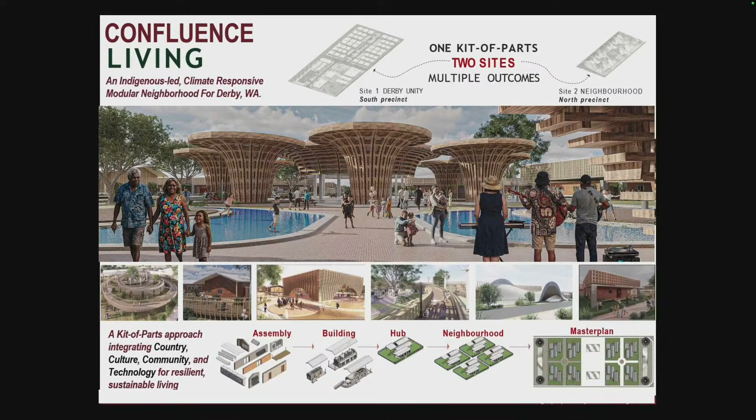Welcome to Confluence Living. Imagine a place where country guides design, culture shapes community, and technology enables a more sustainable future. Confluence Living is an Indigenous-led, climate-responsive neighbourhood for Derby, Western Australia. Built out of one simple idea: one kit of parts, two sites, multiple outcomes. Through modular design, digital engineering, and modern methods of construction, we've created a scalable housing solution that is resilient, culturally responsive, and adaptable to future community needs.

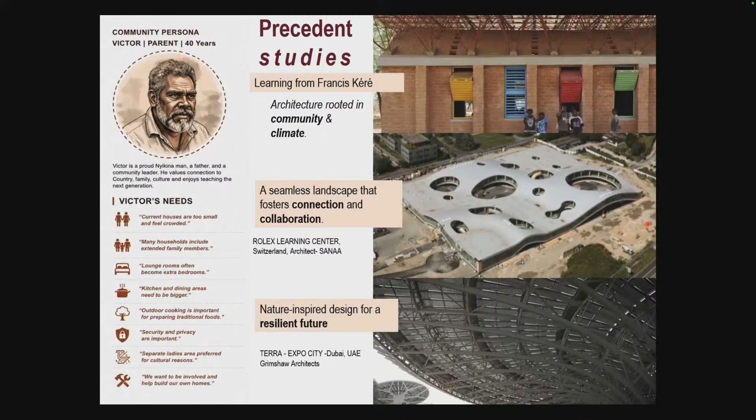Confluence Living isn't just inspired by great projects around the world. It begins by listening to the Derby community through Victor's story and understanding what people truly need. We then combine those local aspirations with lessons from Francis Kéré's community-centered architecture, the collaborative spaces of the Rolex Learning Centre, and the climate-responsive design of Terra, Expo City Dubai, creating a neighbourhood that is culturally meaningful, resilient, and built for the future.

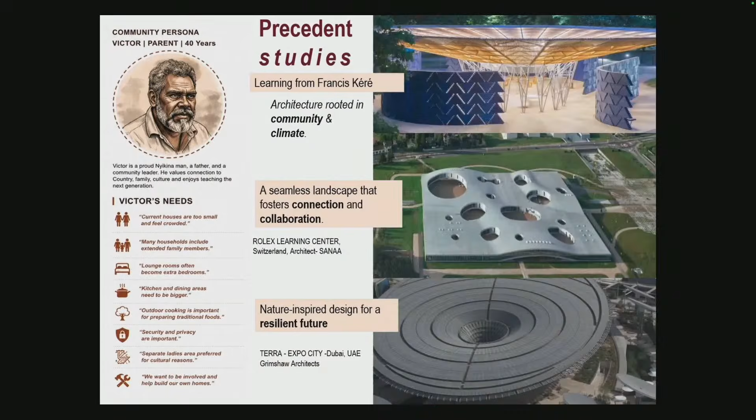Confluence Living transforms community aspirations into a practical design solution. Our approach first begins with understanding Derby's climate, culture, and community needs.

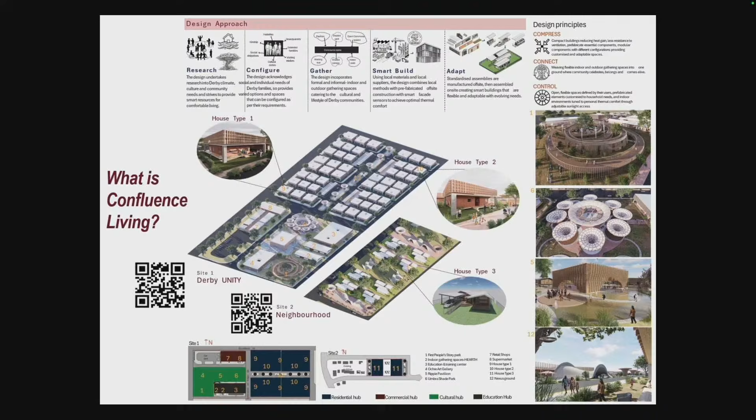Configuring flexible spaces for different family structures, creating places that bring people together, integrating smart construction and local materials, and finally adapting through a modular kit of parts system.

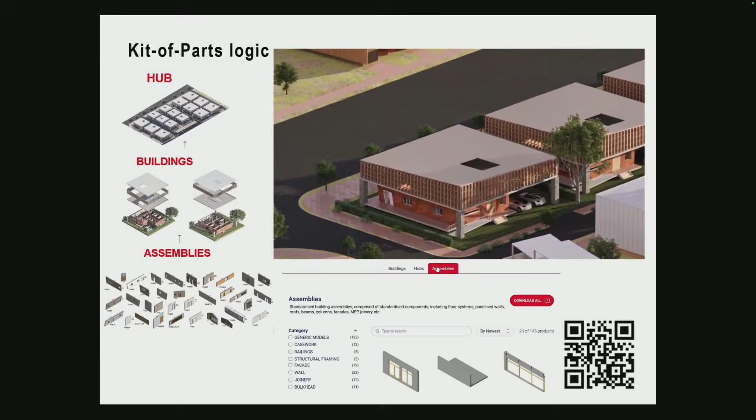Our design follows a simple kit of parts logic. Standardized assemblies come together to form adaptable homes, and those homes are organized into connected community hubs. This creates a flexible system that can grow with the community.

Our kit of parts system creates a complete neighborhood through a simple hierarchy. We developed 4 functional hubs: residential, cultural, commercial, and educational. Within these hubs, we designed 9 different building types.

These include 3 housing typologies and a range of community facilities, such as the pavilion, art gallery, education center, retail spaces, and supermarket. All of these are assembled from a shared library of standardized components, allowing both sites to be delivered efficiently while responding to different community needs.

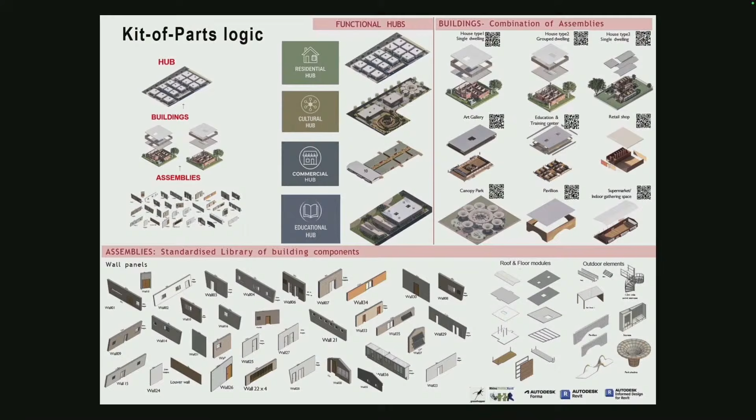Listening to the community showed us that one house type wasn't enough. We created 3 housing typologies: a multi-generational family home, a flexible home for smaller households and essential workers, and a clustered home with shared living spaces for extended families. Together they reflect the diverse ways people live in Derby.

Let's take a closer look at house type 1, designed for multi-generational living. Using our kit of parts system, standardized wall, roof, and floor components are assembled into a flexible home that can be built efficiently.

The central open courtyard improves natural ventilation, daylight, and family interaction, creating a comfortable home that reflects the way extended families live in Derby.

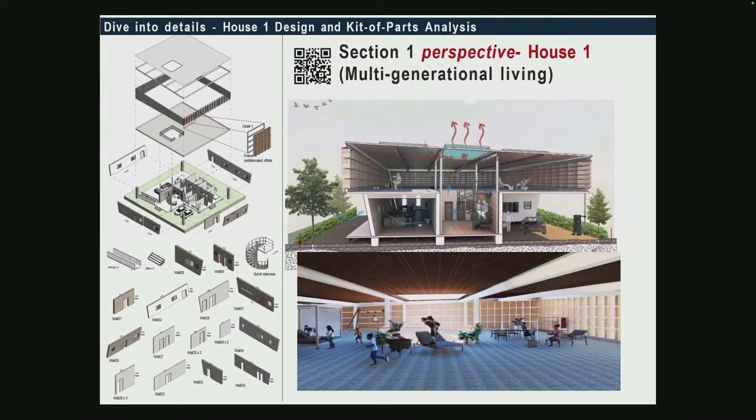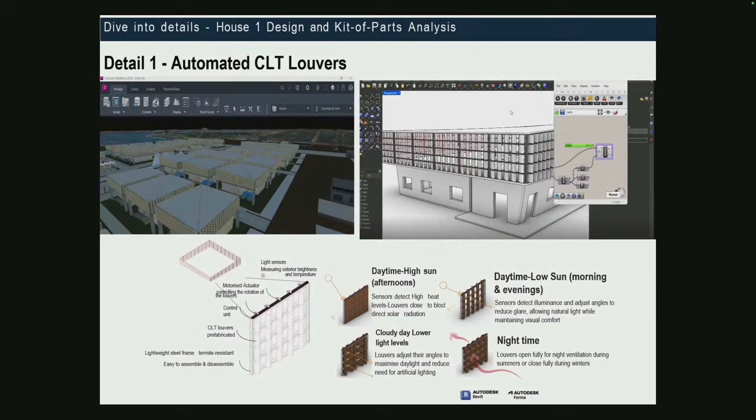To improve comfort and energy efficiency, we developed automated CLT louvers using Rhino, Grasshopper, Revit, and Autodesk Forma. Light and temperature sensors continuously adjust the louvers throughout the day, blocking excessive heat, maximizing natural daylight, and providing natural nighttime ventilation. This creates a smarter, more comfortable home.

Sustainability is integrated into every part of house type 1. Elevated floors, deep shaded verandas, natural ventilation, high performance wall systems, and solar energy work together to improve comfort and reduce environmental impact. Using Autodesk Forma Carbon Insights, we also optimize the design to lower embodied carbon while creating a home that responds to Derby's climate.

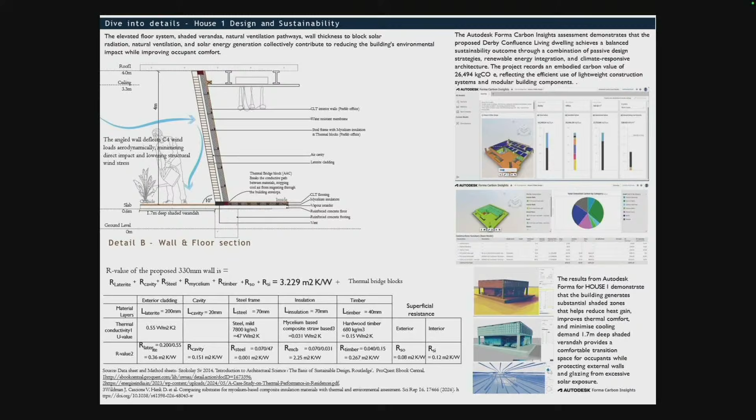We used a BIM integrated structural workflow, transferring our Revit model directly into Autodesk Robot Structural Analysis. This allowed us to test the building under real loading conditions, optimize the structure, and ensure it is safe, efficient, and ready for construction.

To support construction and coordination, we developed a federated BIM model at LOD 300, integrating mechanical, electrical, and plumbing services. Using Autodesk Revit and Navisworks, we coordinated all disciplines, resolved clashes before construction, and delivered an efficient, buildable, and fully coordinated MEP design.

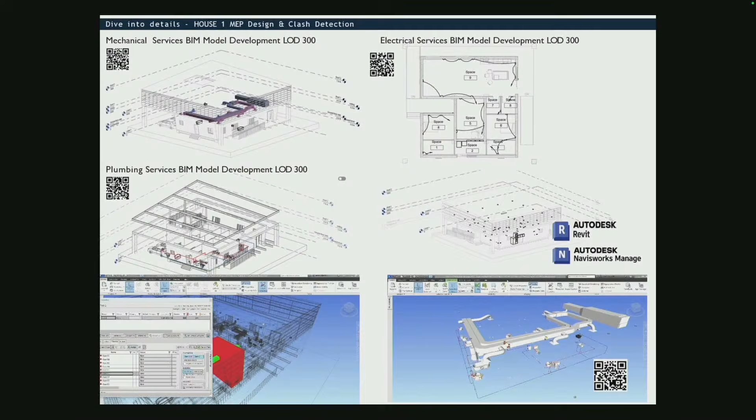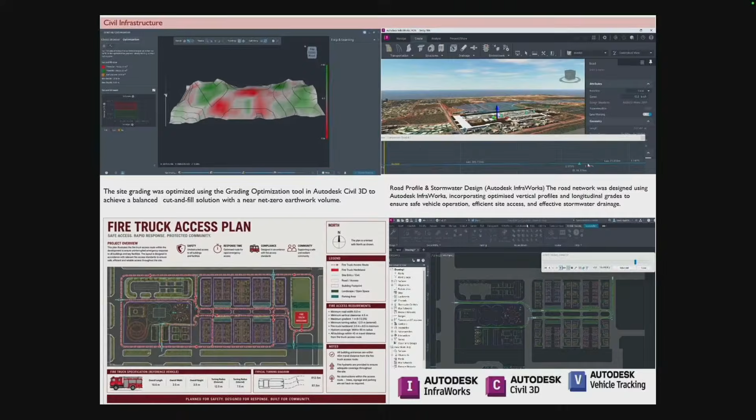Our work extends beyond housing to the entire site infrastructure. We optimized earthworks to minimize cut and fill, designed roads and stormwater systems, and verified emergency vehicle access using vehicle tracking. Rather than resisting nature, Confluence Living works with it.

We use prevailing winds for natural ventilation and renewable energy, while integrated bioswales, infiltration tanks, and rainwater harvesting manage stormwater and reduce flood risk. These systems create a climate-responsive neighborhood that is both resilient and environmentally sustainable.

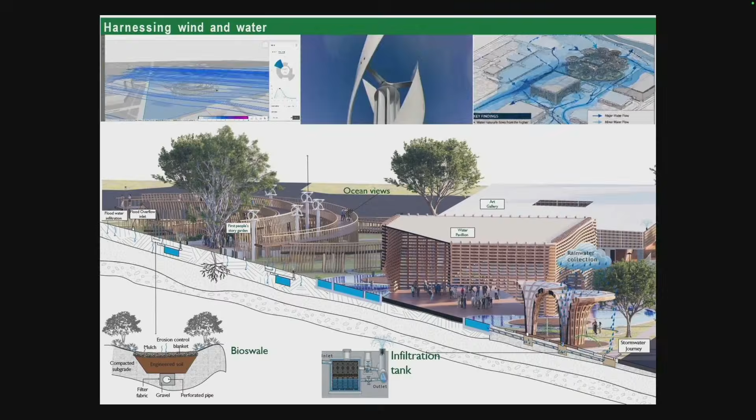At the heart of Confluence Living are our gathering grounds, spaces designed to celebrate Derby's Indigenous identity and strengthen community connections. The First Peoples Story Garden, Umbra Park, and Ripple Pavilion create places for storytelling, learning, festivals, and everyday gathering.

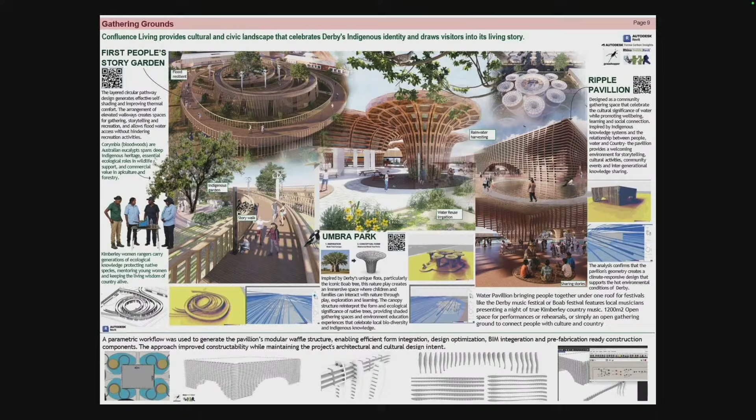Inspired by local culture and nature, these spaces were designed using a parametric modular system, making them both culturally meaningful and efficient to construct. Our proposal goes beyond design by delivering a complete construction strategy.

Through a temporary local factory, standardized assemblies are manufactured using local materials and suppliers, then assembled on site into homes and community hubs. This approach reduces transport, construction time, carbon emissions, and waste, while creating local jobs and supporting Derby's economy.

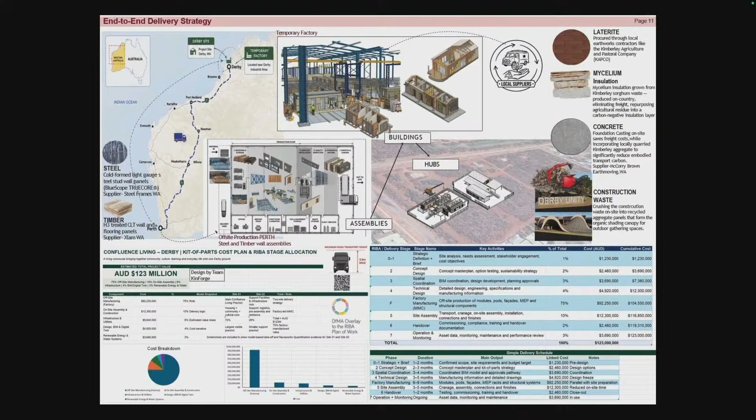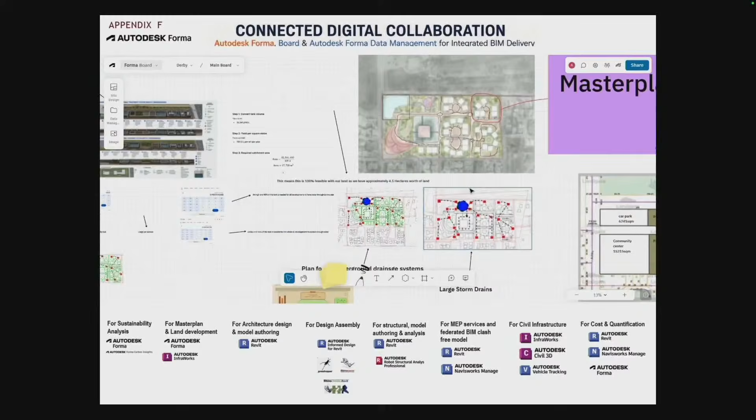Confluence Living was delivered through a fully connected digital collaboration platform. Autodesk Forma, Board, and Forma Data Management enabled our entire team to collaborate in real time.

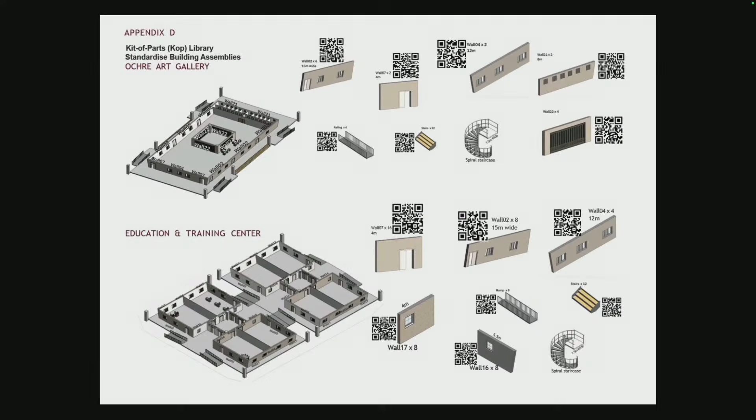Finally, our appendices provide the complete kit of parts library for every building in the project. Each assembly, wall, roof, floor, and structural component is documented with digital models and QR codes, creating a standardized reusable system that supports manufacturing, assembly, future maintenance, and scalability across both sites.

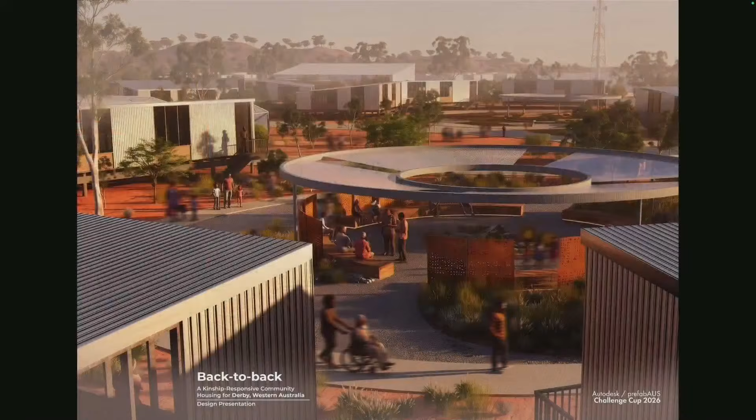I understand that we're playing my video, but I'm also happy to present live. Can you just say something? Yeah, we're playing your video now. Thanks, Mackie. Hello everyone, this is Back to Back, a kinship responsive community housing model for Derby, Western Australia. Can we see it? Can you grab the laptop?

This is an Indigenous-led housing community master plan aimed at proposing culturally grounded housing solutions using sustainable building technologies and construction methods for regional Australia.

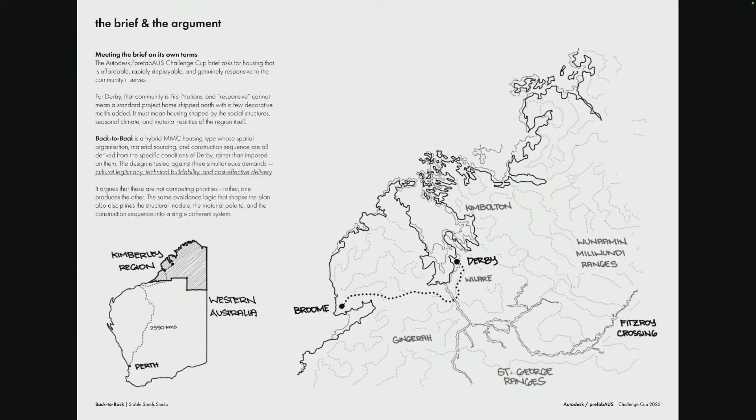The brief calls for housing that's affordable, rapid, and genuinely responsive to community. For a First Nations town, that can't mean a standard home with decoration added, so every decision here, plan, material, structure, flows from one cultural logic.

And that logic is what is called a Jigal, a Kimberley protocol where a son-in-law and a mother-in-law will avoid direct contact out of respect, not out of shame. It's how a large household functions harmoniously when visiting kin stay long-term. A standard home with one door and open living makes that very hard to observe. So we started not with the floor plan, but with that relationship.

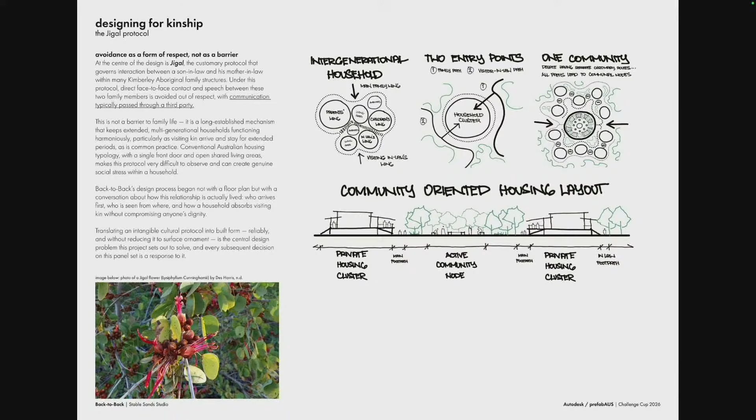The answer is two equal wings joined by a shared spine. The core family's wing and the visiting in-law's wing each get their own entry, deck, and living space, so a mother-in-law can stay with dignity, not tucked into a lesser granny flat. The spine between them is shaded and ventilated, close but not face-to-face.

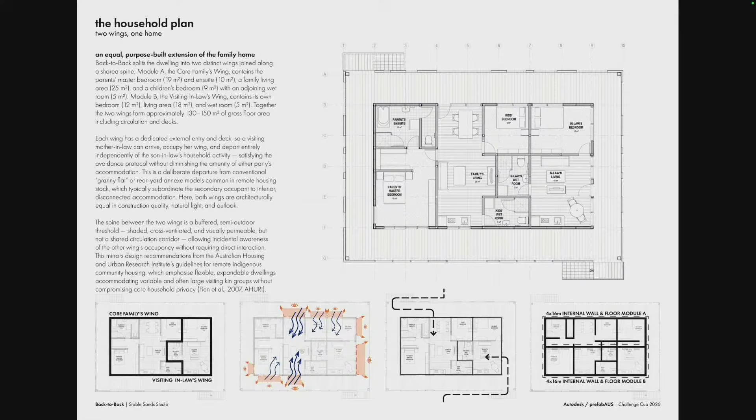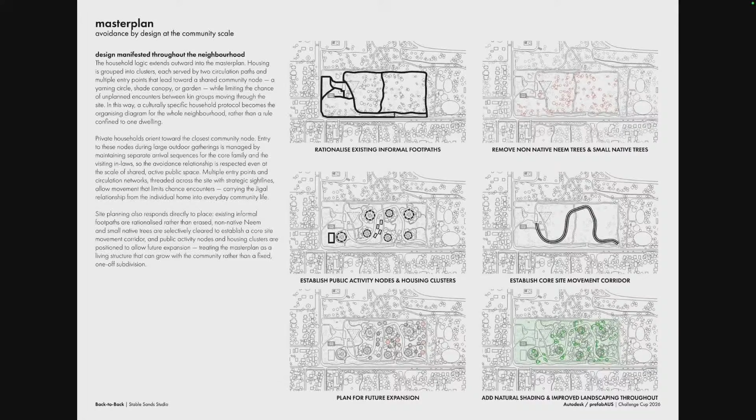That logic scales out. Each housing group gets two circulation paths and multiple entry points, all leading to shared yarning circles and community nodes. So the same protocol holds even in busy public space.

We kept the site's existing footpaths and planned the whole layout to grow over time. Shared ground sits at the center: yarning circles, barbecue nodes, and an adaptable polytunnel garden that flexes with the Kimberley seasons, supporting farming and gathering all year round. It's public space that's shaped around how the community already moves and meets.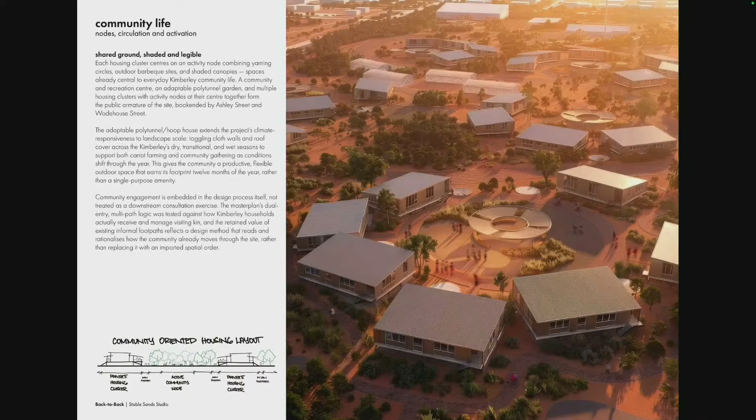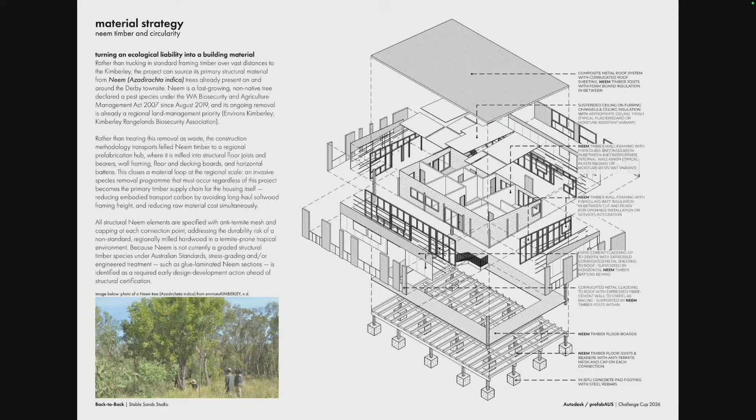The house is built almost entirely from neem timber, an invasive species already being removed from around Derby under a biosecurity program. Instead of trucking timber thousands of kilometers away, we mill that removed timber regionally into framing and decking. A land management obligation becomes the building's material supply chain.

Everything is designed for off-site manufacture. Transportable 4x16 meter walls, floors, and roof modules are built in a regional prefabrication hub with services fitted before they reach site. Only footings and final assembly happen in Derby, taking one dwelling from 6 months down to 10 to 12 weeks.

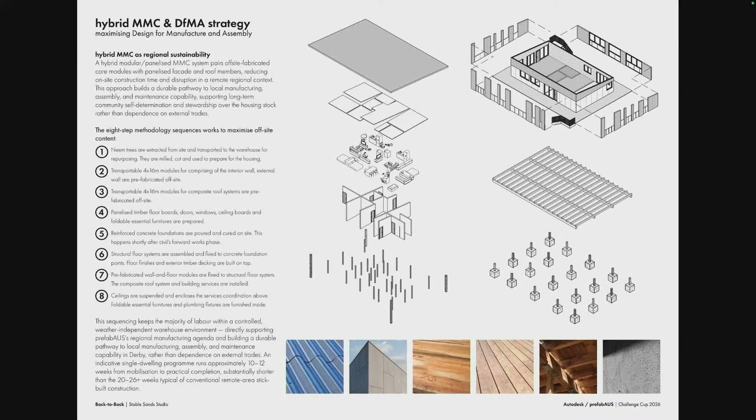Structurally, it's a lightweighted, elevated timber platform on isolated concrete footings, chosen because it prefabricates cleanly, resists Derby's cyclonic wind loads with continuous tie-down strapping, and keeps the undercroft open so floodwater passes straight underneath.

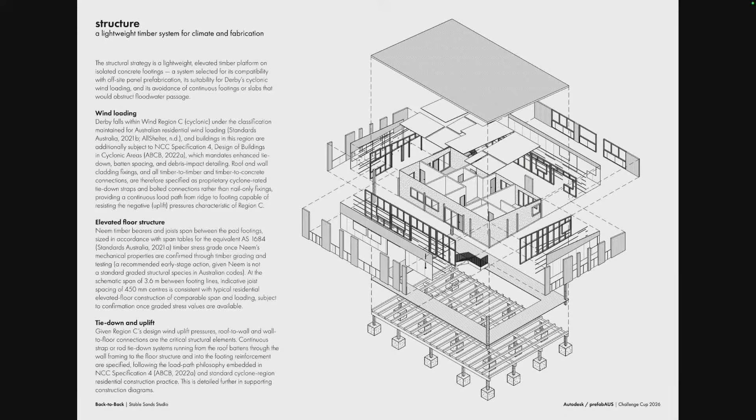Passive design comes first: cross ventilation, deep shading, and a ventilated roof cavity reduce reliance on air conditioning before any technology is added. The floor sits clear of flood level, and every dwelling is pre-wired for solar and battery storage.

Services follow the same logic. Bathrooms and kitchens arrive pre-plumbed and pressure tested. Wiring is pre-installed in wall and ceiling panels so on-site. Trades simply make final connections.

None of this works from architecture alone. It took structural, sustainability, and cultural expertise working as one team, and it's costed to prove it: around $450 to $580,000 per dwelling, with the first 13 homes feasible within 4.4 to 6.9 million. Thank you.

I'm really interested to hear about what you learnt from the Traditional Owners during the workshop that informed your design, apart from the kinship aspects—certainly things around site layout and overall building arrangement, if you want to talk a little more about that.

Yeah, for sure. The workshops were always the starting point, because Aboriginal housing has always failed in a sense that so far it's been gentrified with the types of housing that the government has given the First Nations people, especially around Broome.

I've been to Fitzroy Crossing, I've been to Derby myself, I've been to Broome, and it doesn't work because the intergenerational household is very unique for them. As the nuclear family grows up, the grandparents move seasonally, from one side to the other every few weeks or so. And of course, the Jigal is one that we don't expect from a Western standpoint—it's actually a hierarchy and a principle of respect.

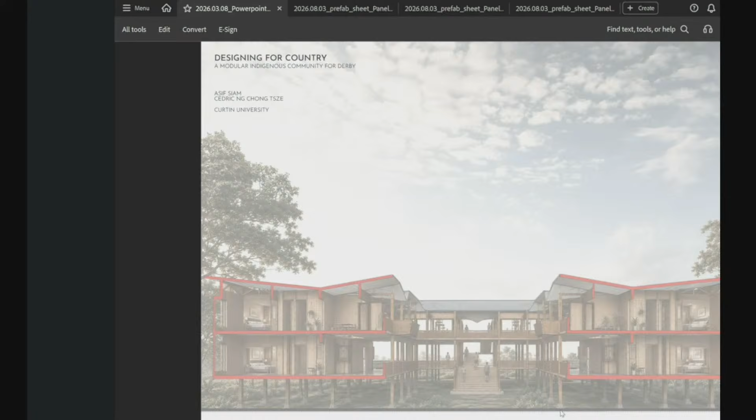Thank you very much. Today we had the opportunity to design prefab housing for Derby, and me and Cedric, my teammate, had the chance to design this. From the very beginning, I'd like to say this is a great opportunity to work for the indigenous people, because as an immigrant here, this opportunity just came out of nowhere for me. Firstly, I would respectfully like to acknowledge the elders and custodians of this land.

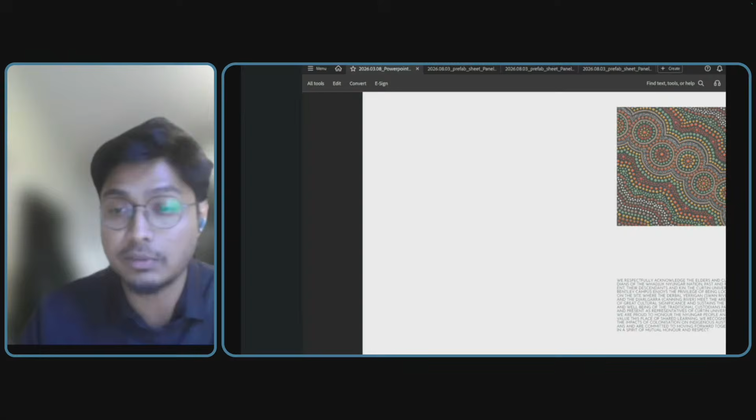This has been a big journey for me, because I took these courses the other way around, and during this time I had the chance to learn more about Derby and more about the indigenous people. A little brief about the indigenous people around here, and also about Derby itself.

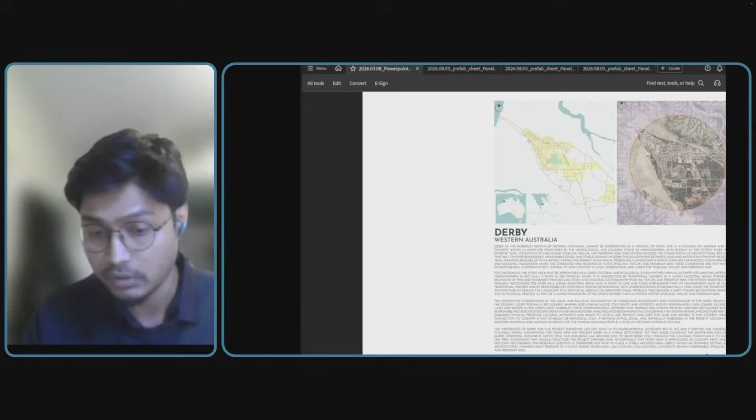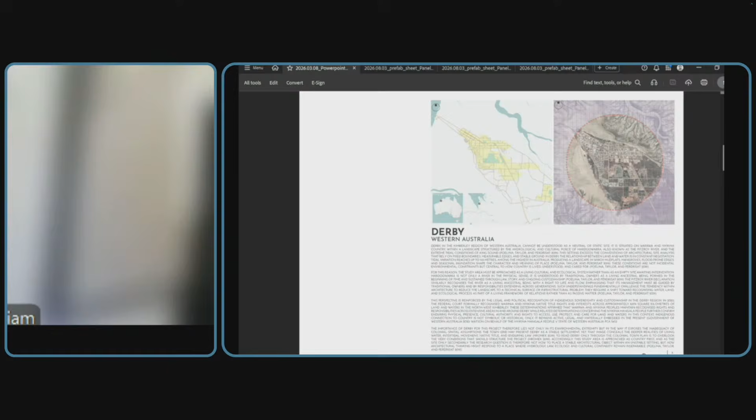Derby is a small, remote town in the Kimberley region in northwestern Australia, located on Nyikina and Warrwa country, surrounded by the tidal landscape of King Sound. Topographically, the site is flat and low-lying, with chances of flooding every now and then, because tidal variations can rise up to 11.8 meters. Climatically, it's a hot, tropical climate zone with a distinct wet and dry season, and during the wet season there's a significant amount of rainfall.

Socially, Derby has a strong Aboriginal presence and connection to country. Community-wise, it's extended family and cultural relations. In terms of employment, I've seen people involved in healthcare, education, government service, tourism, pastoral activities, and particularly cattle farming. So Derby's lifestyle is shaped by country, community, climate, and water.

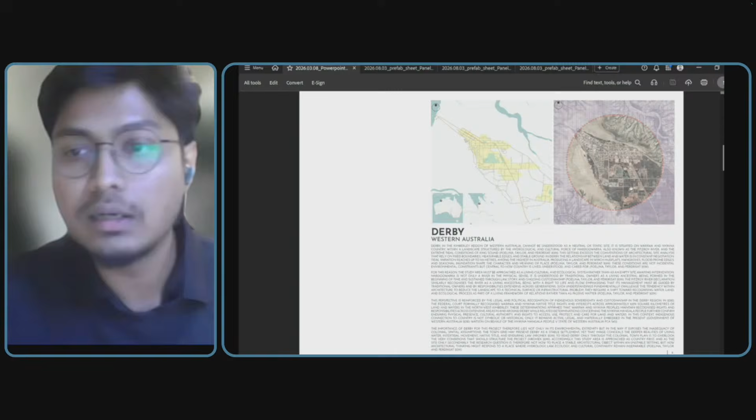This is our initial thinking about the whole situation there, and how we can develop housing over there. I want to start with the elevated plane approach. People have been living there with the tidal force and the flooding over there, so they had to elevate their house, elevate the plane, so that they can survive the flooding.

So we raised the platform a bit more, one floor beneath that, so it can help with circulation, help with cooling down, and also help with prefabrication opportunities, because with the structure and everything we're already lifting it up, so why not lift it up all the way to the first floor?

For the central part of our clusters, we designed a clustered module so we can have a yarning circle between the clusters, and every individual cluster has its own yarning circle, which will cooperate with the community kitchen, the connection, and the visual connection as well.

For the floor plans, as you can see in the initial sketches, we tried to keep toilet separation between the mother-in-law and son-in-law, so we could think about giving them separation at those times as well.

In terms of living space, since we've seen this is an extended family connection within everyone, we kept the living space as a semi-private zone, so they can open it up and use it as extended sleeping facilities as well.

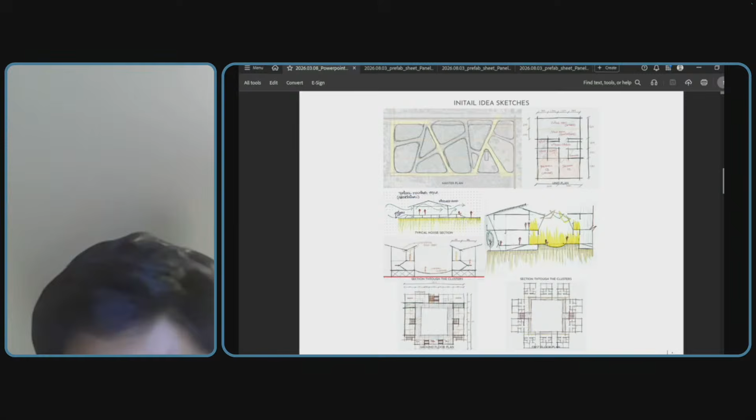On the ground floor level, we have a semi-public community space, semi-public community kitchen, laundry spaces, and some of the clusters have parking spaces as well.

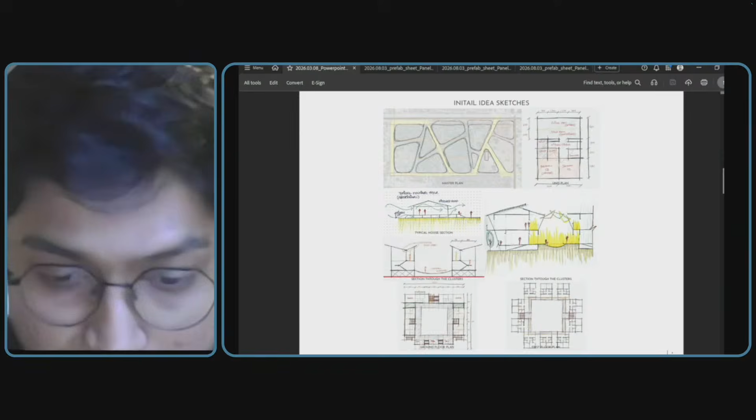For the function of the ground floor, we selected a few options like the health sector, aged care, preschool, a departmental store, cattle farms, and admin as well. The master plan segmented the land from the beach around Derby, and within the site we tried to protect as many trees as we can.

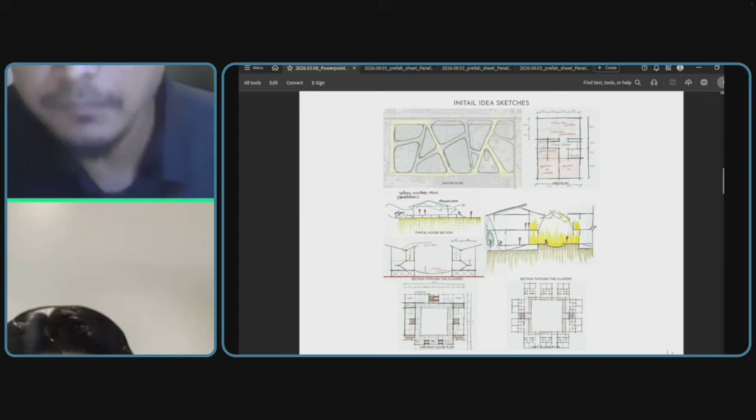For sustainability, the materials and the elevated plane help us cool down and also help with flooding. We are trying to use timber as our main structure, which will be locally sourced. Other materials will be transported from here, but we're planning to establish manufacturing on site so the people living there can be responsible for maintenance and maybe future expansion.

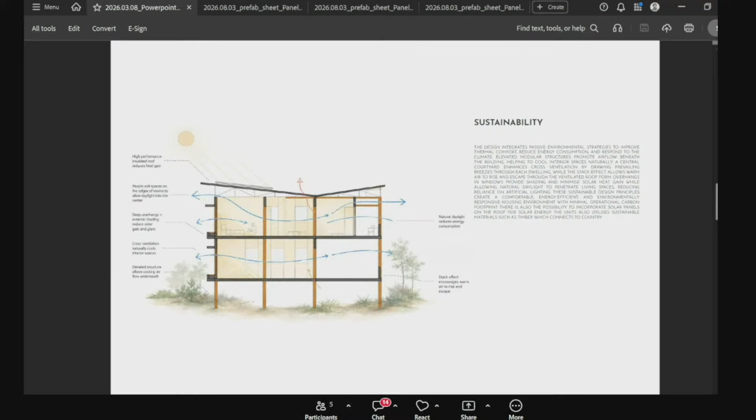Next, for the master plan, as you can see, it's derived from the local topography there. We try to replicate that and keep as many trees as we can, with road networks and pedestrian networks throughout the whole place.

I'd like to show a few facilities we try to provide, like the cattle farms at the peripheral area, so the outdoors elements don't come all the way towards the housing sector. The aged care is the centerpiece of the whole neighborhood, so everyone can be involved with each other and take care of the elderly people there. The healthcare, the preschool, and the stores can be more engaging within the whole neighborhood.

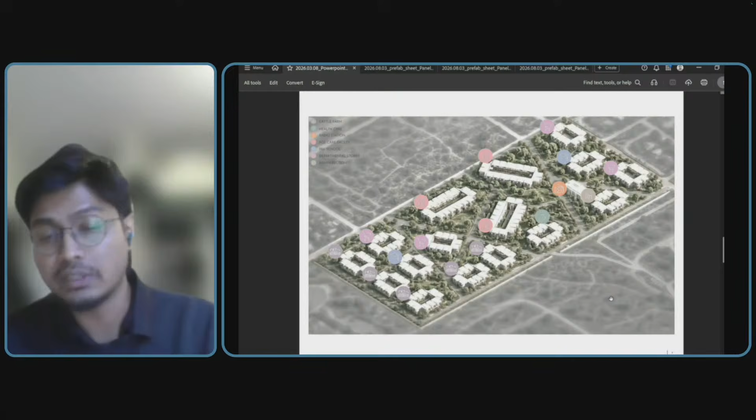This is the cluster plan. We have a prefabricated unit, 3.5 by 9 meters, done as a flatbed plain surface. Once we get it to the site, we will assemble it all together, and the timber structure will connect everything, so the whole thing beautifully creates the cluster we are planning to do.

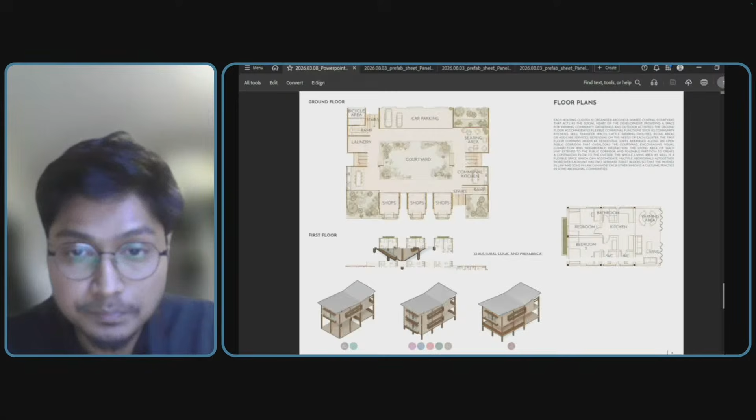For the floor plans we have right now, the ground floor will accommodate the community kitchen, laundry space, seating area, courtyard for the dining circle, some parking space, bicycle areas, stairs and ramps, along with designated functions like the aged care facilities, the shops, or the cattle farms.

For the first floor, as you can see, there's a 2-bedroom apartment with extendable living space at the front and a little kitchen space, so even if they have the opportunity to work together, to build in time, to cook together and everything, they still have their personal space.

The whole idea we tried to accomplish with this housing was so people can actually communicate and be more involved with the whole neighborhood, so they can be self-independent. We had a chance to chat with Mr. Victor, an elderly person from Derby, who gave us ideas about how people can be involved with this neighborhood's economic situation, so they can be independent, involved, and responsible for growing this society to the next level.

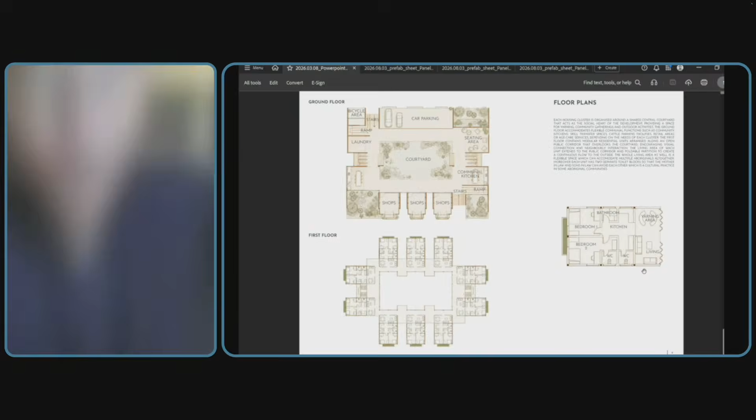In the end, I'd like to mention that we had some renders showing how the courtyards will work, how the housing society will look from the outside, the views from the living spaces, and the community kitchen. Thank you.

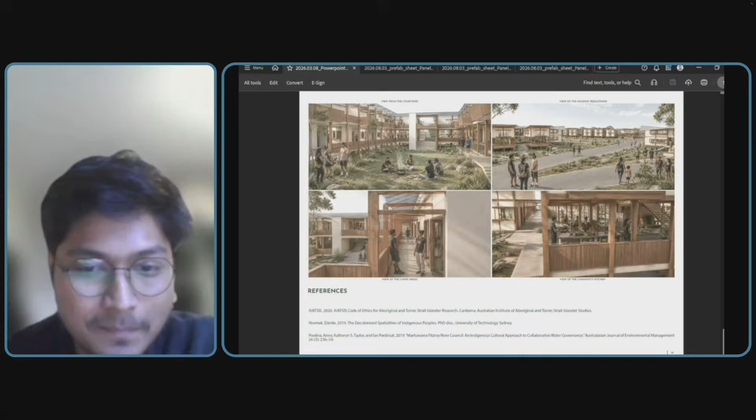I'm really interested to hear about the overall site master planning, what insights you got from the workshop with the local Indigenous community. Sorry, can you repeat the question, please? Yeah, in terms of the overall site master planning, what sort of insights did you get from the local community?

For the master planning? Yes.

I started with ideas like how social events or social interactions happen there. I found it's sort of a connected approach, so I tried to bring everyone together in one place with a shared lounge and shared community spaces around the neighborhood, so whenever they're involved in socioeconomic activities like the preschool, aged care, or cattle farming, they can be responsible and codependent on each other.

The whole master plan comes together with the centerpiece being the aged care, with health facilities right beside it. This is the core area, so all the people coming towards it feel more welcoming. The other areas are the supporting part, like the stores, cattle farming, and preschooling, so everyone gets involved with this neighborhood and has reasons to live and grow successful together here.

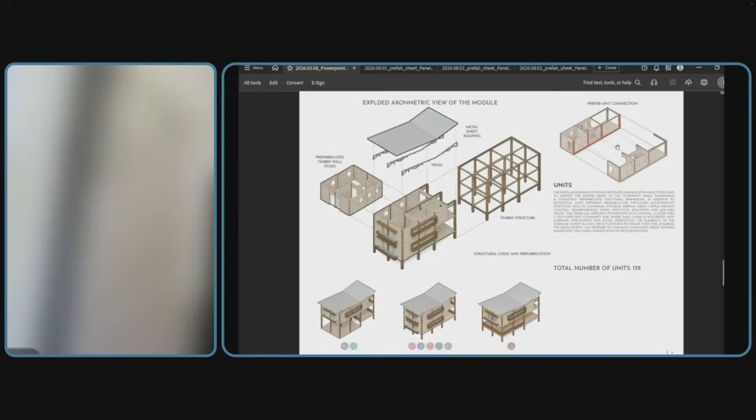For the prefabricated unit, we tried to dissect it into very little pieces. We started with a single unit, just one house plan, and then brought together the cluster plans, with the upper level working as a living quarter and the ground floor working as community functions, like the community kitchen, aged care, and cattle farming. The people responsible are those living right at the top.

For the units, this is mostly flat-packed — floor plates and walls will be flat-packed and everything transported towards Derby before we have a manufacturing plant established there. All the materials we're trying to use are locally resourced, so any maintenance can be done throughout.

The idea was to start training the people living there, so they can be the ones able to do the next expansion or maintenance. I've seen adjacent site areas also planning to expand in the future if this housing society is really successful. My understanding was to build something together so they can build it by themselves — that was the whole idea.

It's fantastic looking at the opportunity to engage with the local community for skills and training opportunities for future sustainable industry outcomes. Well done. Yeah, great stuff there, Asif.

My question falls a little between what Lawrence and Damien asked. Looking at the master planning, the site design, and then the individual prefab aspects — how did you think about connecting the requirements? What was your use of digital tools to have consistent and smooth requirements and data flow across those different scales?

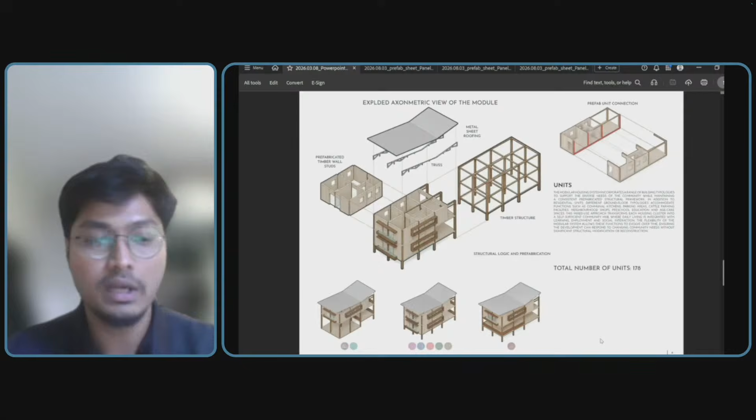Great. Thank you. Thank you, Asif.

I guess, just generally, how do you think the submissions this year have been? Lawrence, you've been doing this for 6 years now, you've seen a lot of these projects and submissions, and I think the connection to the cultural significance and engagement with the local community has been very thorough. It's fantastic to see. Yeah, I think the brief this year gave some really good opportunities for a very different approach to the competition. In past years, there's been a strong focus on different ways of doing prefab. Pulling it back to look at how it can be more responsive to a local community was really interesting, and seeing some quite complex and nuanced responses from all the teams has been really interesting to watch.

I think Indigenous housing is not just an Australian challenge, the engagement and community input into that has a global outcome, really, because Indigenous communities all around the world need culturally significant housing that addresses their needs. So for you, how do you see that translating across the globe, specifically with design tools?

Yeah, well, I think what's particularly impressive from the presentations we've seen is you're taking very human, qualitative requirements and having to translate them into something technical that needs to speak a certain design language and work with the tools we have. From everything we've seen, I think the teams have done a fantastic job of that. Whatever your design is, ultimately it's that translation of requirements into a design. Obviously we have digital tools to help us, but I want to emphasize it comes back down to people, and I'm really seeing that shine through in these designs.